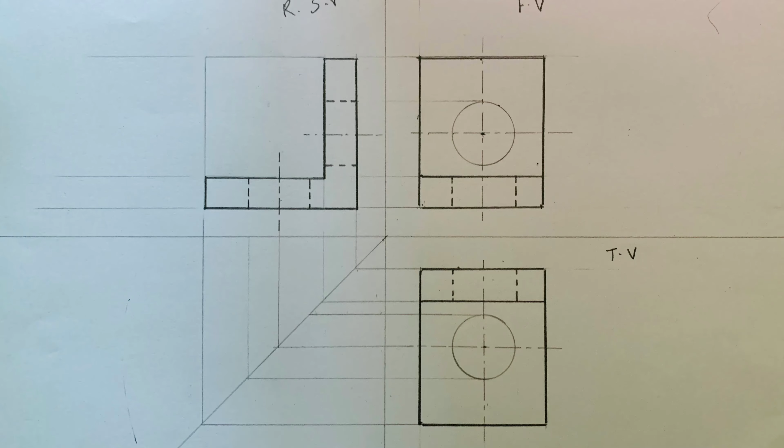So boys, today I am going to start with first angle projection. So first things first, I need to start with the border. So I am going to fix my paper inside. I am going to see, is it correct or not, is it straight or not. Yes, it is straight.

So I am going to mark the border as usual, 10, 10 and 10. So I am going to mark 10, 10 and finally 10, and also another 10 for the name title block. So my paper is ready.

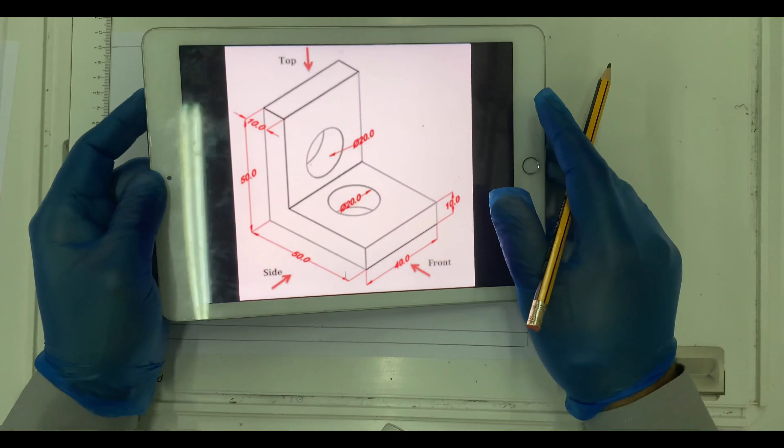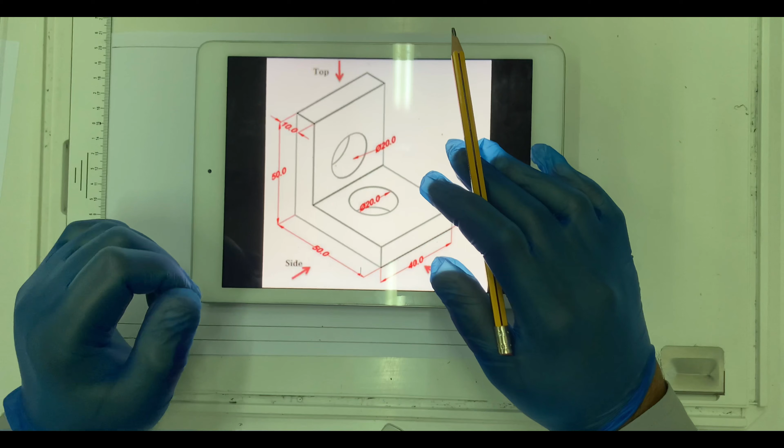Now I am going to study my drawing. This is my drawing in which I have to make 3 views using first angle projection. You can look at the arrow mark here. So this is the front view, and this is the side view, and this is the top view. So I am going to start with the front view, and top view at the bottom, and left side view at the right, and right side view at the left.

So these are my dimensions. So I need to divide my paper into 4. So that is the first thing I do. Let's say I will take half of it, let's say somewhere around 15. Okay, I mark 15. I took my set square. Somewhere in the middle, okay, I made a thin line. I made this into half, and another line. I take the middle of the paper, and here I made a line. So I have divided this into 4 parts. Okay, and I am going to start with my front view here, top view here, and right side view here.

So as I mentioned in the class, we need to maintain a gap of 10 millimeter from here. So I am going to mark another line 10 millimeter away from here. So one is here 10 millimeter and another 10 millimeter here. So I am going to mark a thin line in this direction and also in this direction, and here is where I am going to make my whole drawing. Okay. So my first lines are ready.

Now I took a rough paper and I am going to study this drawing. This is my front view. So if you look at it from the front, this is a 3D view now. So if I want to make a front view only, you can see I will be seeing only this part, which is 40 millimeter and 10 millimeter. So it will look like this, 40 millimeter and 10 millimeter. Let's say this is 40, this is 10, right? Then if you look further, you can see another 50 millimeter. So 10 millimeter is gone. So we will have another 40 millimeter here and another 40 millimeter here.

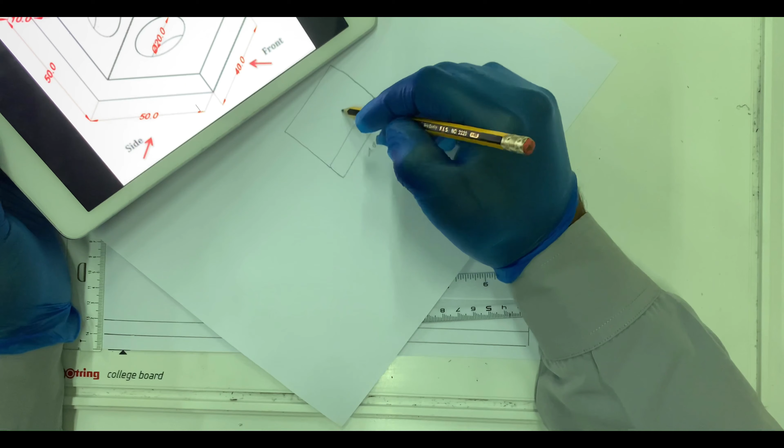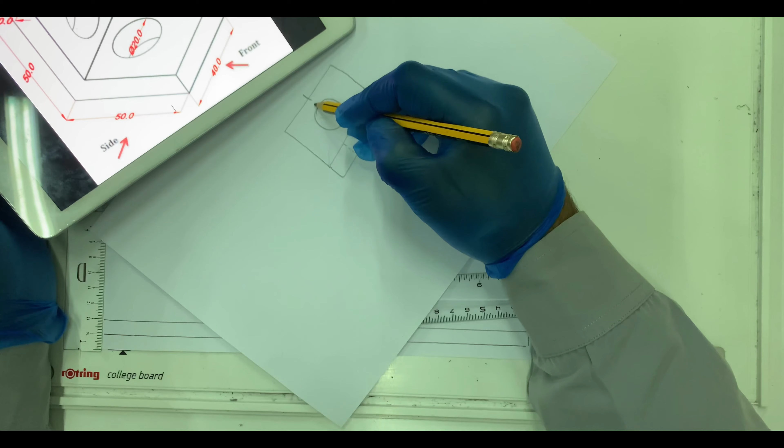And also I can see a circle here, diameter 20. They didn't give any specific dimension. So I will take, let's say, diameter 20. I will take the middle, let's say somewhere in the middle. Here I am going to make the circle. Okay, and there is another circle here which we cannot see, so we will show it as a hidden line. So from here we project, we see this circle as a hidden line, and you know, for any circle we need a center line. So we took the center line like this. So this is going to be my front view, and this is what I am going to draw right now.

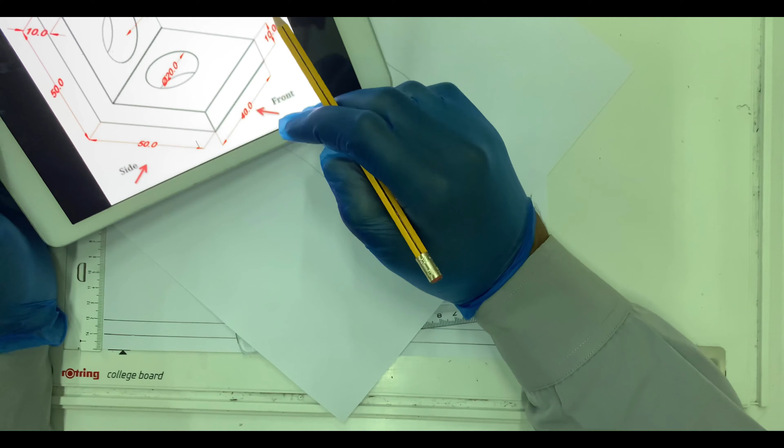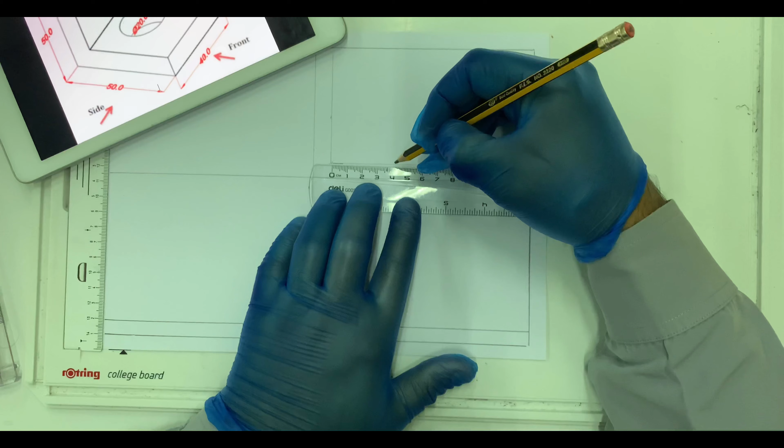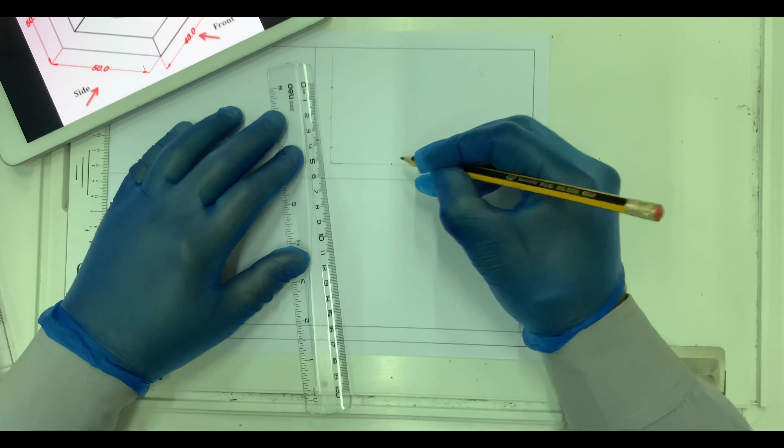Okay. So this dimension is 40 millimeter and the height is 10 millimeter, and this height is 40. So total, 40 plus 10 is 50. So height is 50, width is 40. This is what I am going to do now. So my width should be 40. So I am going to mark 40 here, and the height is first one 10 and second is 40. So total is going to be 50. So I mark a point here, a point here and a point here. So I got 3 points.

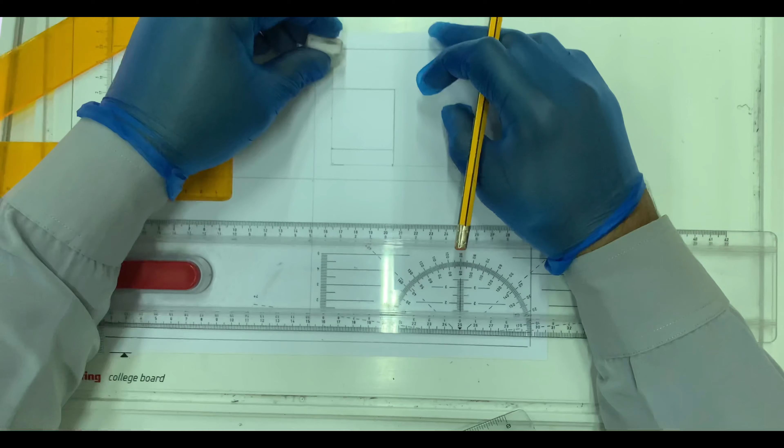Okay. All the extra lines, I can get rid of this extra line, I can get rid of these extra lines, and here also you can see an extra line. So I am getting rid of this, and here also there is an extra line. So I am erasing this. Okay. I am getting rid of this line.

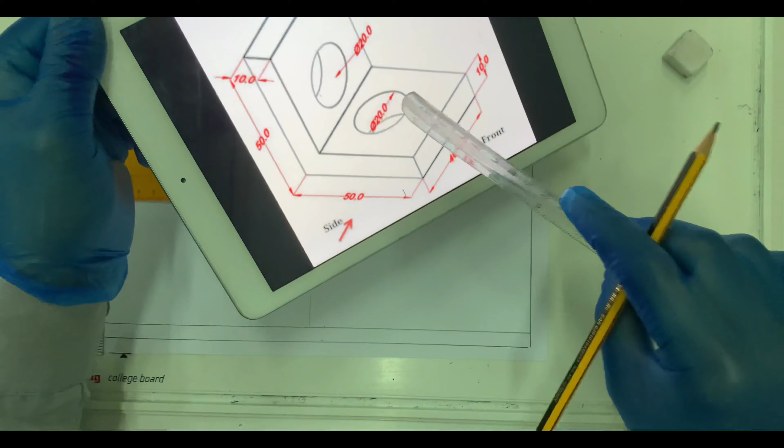Okay, boys. So, I have removed this. Okay. Now, as I told, we need to find out the center point, because we have a circle here and here, right. So, the dimensions are not given here yet. So, it will be 20, 25, 15. Okay, let me mark 25 from here. Okay. This is 50, 40, half of 40 is 20. So, I am going to mark 20 here. I am going to make a center line from here.

From this edge I marked 20 because the total is 40, half of it is 20, and I am going to make a center line: big line, small line, big line, small line. Okay. Now, I take the middle of this. If you look at this, you can see that this is not in the middle, this is a little bit down.

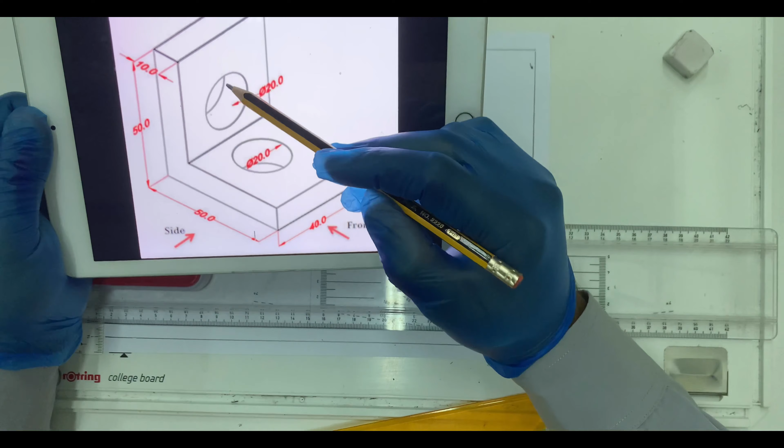So, let us take 25 millimeter from here. From this point let us take 25 millimeter. So, I am going to mark 25 millimeters from here, and I am going to put a point here. Can you see? So, this is 25. I am going to mark this point. I am going to make another center line here. Small line, big line, small line, big line. So, my center lines are ready.

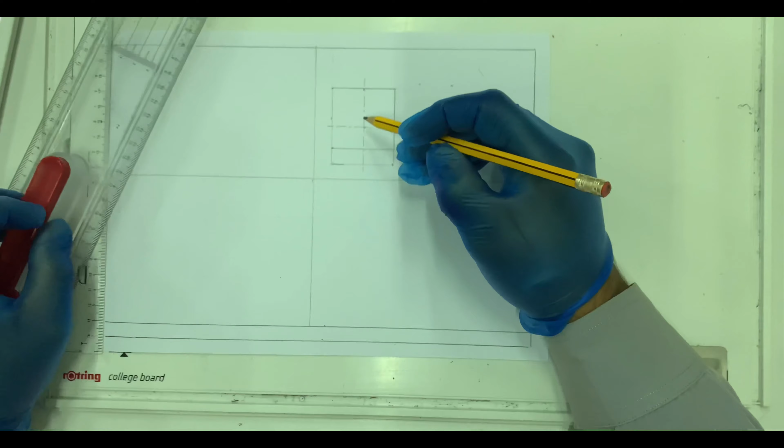Now, as per this, I need to show a circle here of diameter 20. Diameter 20 circle means radius 10. So, in my compass I am going to mark 10 millimeter from this point to this point. Okay. And I put it in the middle, and I am going to make a circle. Can you see this? I made a circle.

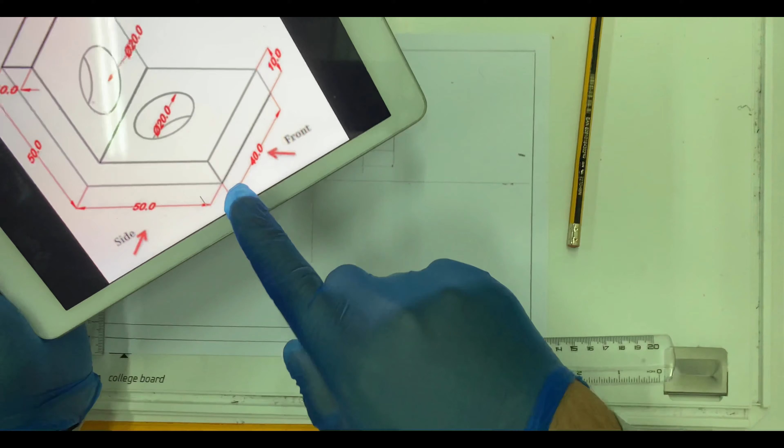So, this is how it looks when I look at this object from the front, but this circle we will also see, not directly, but as a hidden line. This circle we have already shown here, and this circle we have to show as a hidden line. So, I am going to place my set square here, and using the set square I am going to project this. See, this is going to be here, exactly in this dash dash dash, and in here also dash dash. Can you see? So this front view is complete.

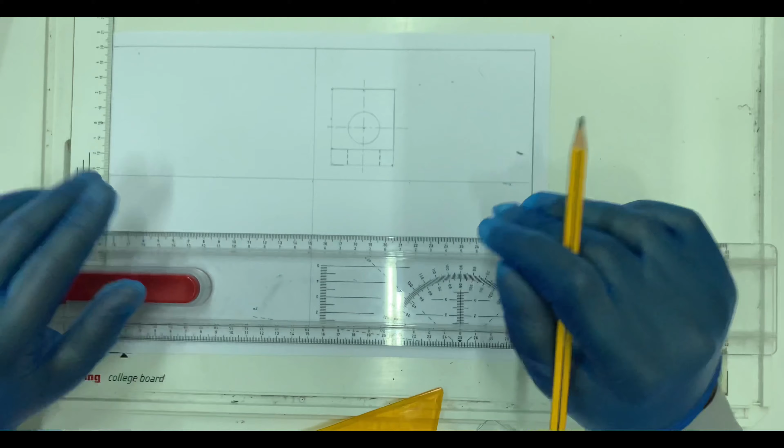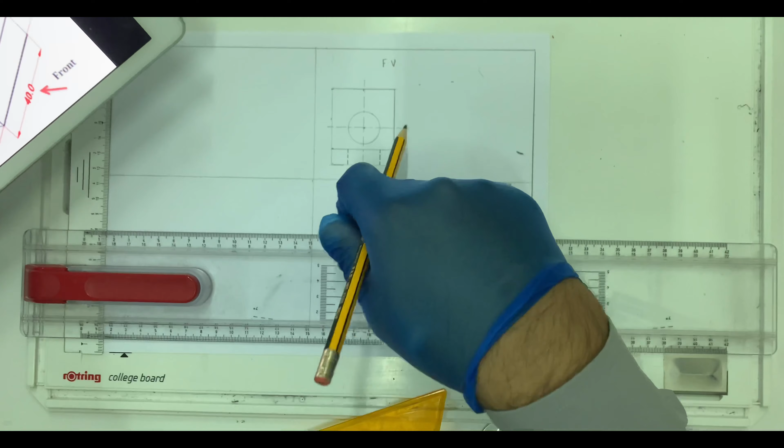Once the front view is complete, we will go to the next view. We can name it as FV, front view. Now we have to make the top view, how it looks when we look from the top. Top view should be here in a first angle projection. Top view will be in the bottom, at this point. So in order to do that, we need to do some projections. You know what projections are? If you don't know, I can help you with that. We will need to project these lines to the bottom.

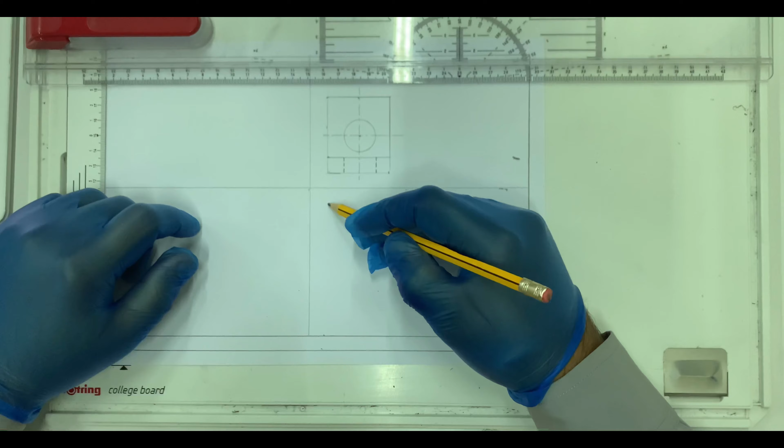Okay, and as usual, we need a 10 millimeter line here. So I am going to do that. So this I am going to put, let's say, a 10 millimeter line here, and another 10 millimeter in here. So I kept it here and I put it here, and I made another 10 millimeter line here.

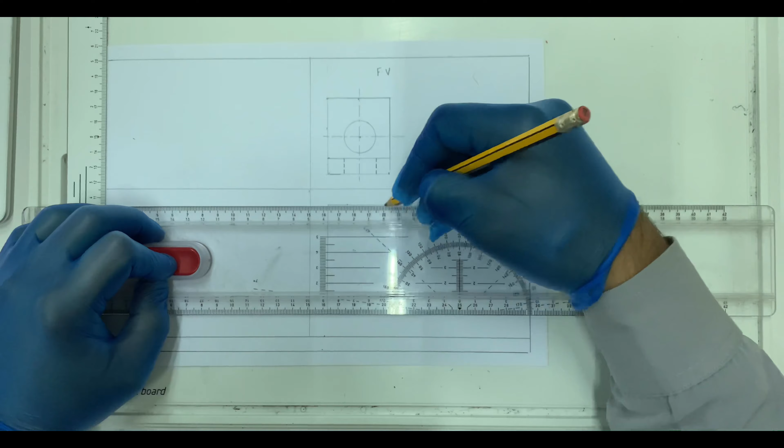Okay. Now I am going to project all the lines here. So I will keep my set square here, T-square here, and I am going to project all these lines. This line I am going to project. This center line I am going to project. You will see how much we need.

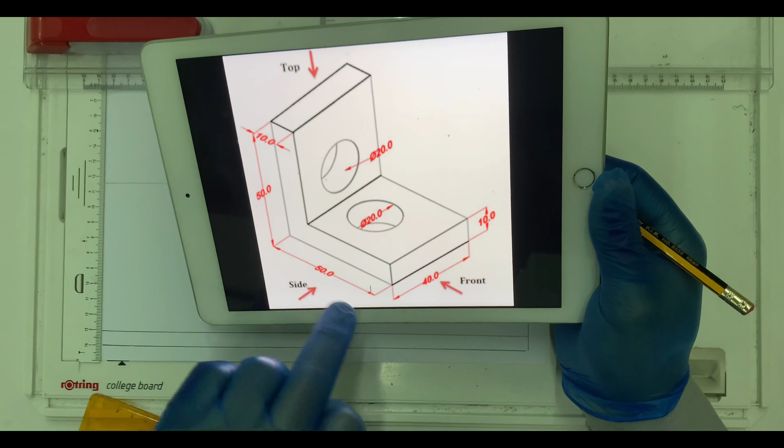If you look from the top, this thickness is 10 millimeter and this whole length, from this point to this point, is 50. So I need to mark only 50 millimeter from here. So from this point I am going to mark 50, and this is my point. So I moved it here and I joined these 2 points.

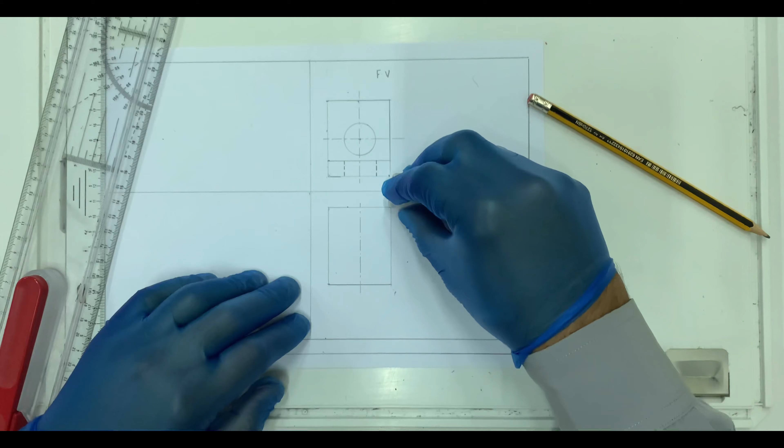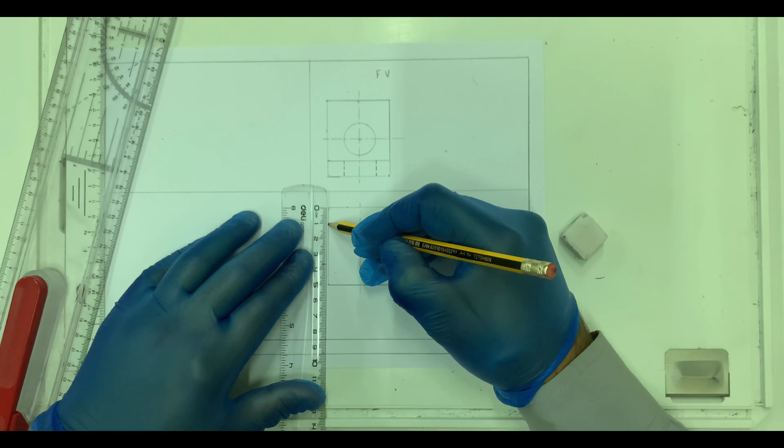Okay, I don't want this extra line, I don't want this extra line. Okay, all the extra lines I have removed. I think you got it. But if you look from the top, you will see this as well as this. So we need to show this line which is 10 millimeter from here. So I am going to mark another 10 millimeter from this point to this point, and I am going to mark this. Now there is a problem.

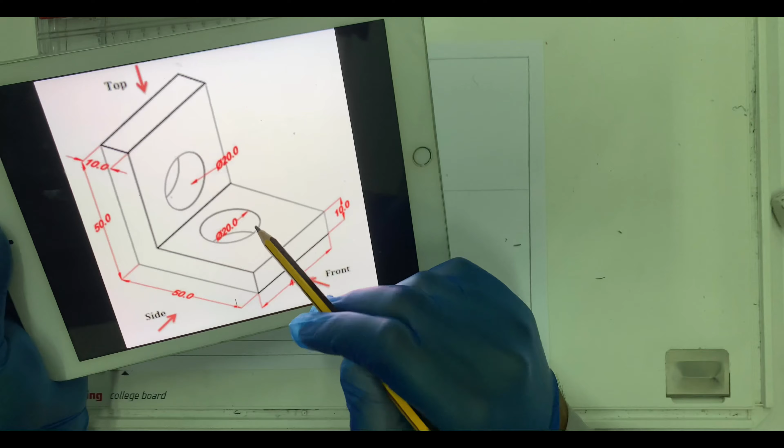If you look from the top, what are the things you are going to see? You will see this line, yes, you will see this, and you are going to see this circle as well. This circle you must show. Similar to this, you need to show this circle.

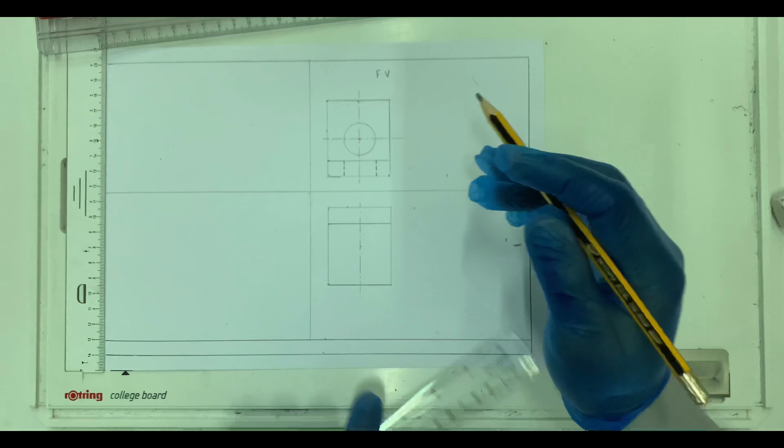Okay. So I will mark 25 from this point. This is 25, and I will put a dot at 0. Okay. And here I am going to make the center line: big line, small line, big line, small line, big, small, big, small.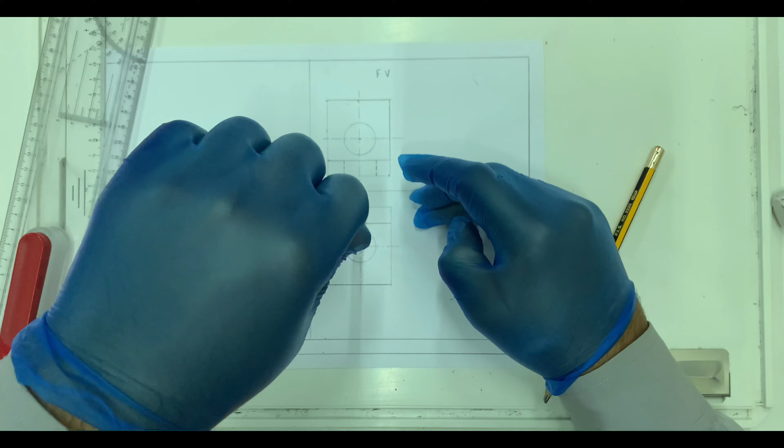Okay. Then I will take the same compass which I used to draw this circle; the same dimension circle I am going to repeat here also. So from top, this is how it looks, and from top, when you see, this will be like a dashed line, this will be like a dashed line.

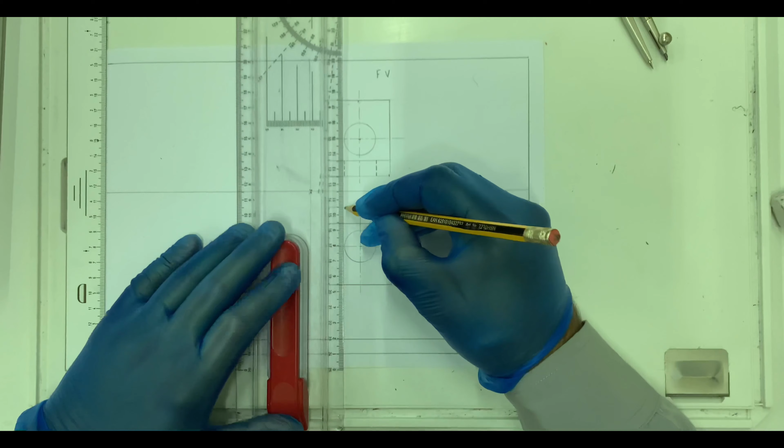So I will project these dashed lines from here. See, the same dashed line I am going to project here. Okay. So, this is my top view, I call it TV: front view, top view. Now, I am going to make a right side view, which will be on the left of this.

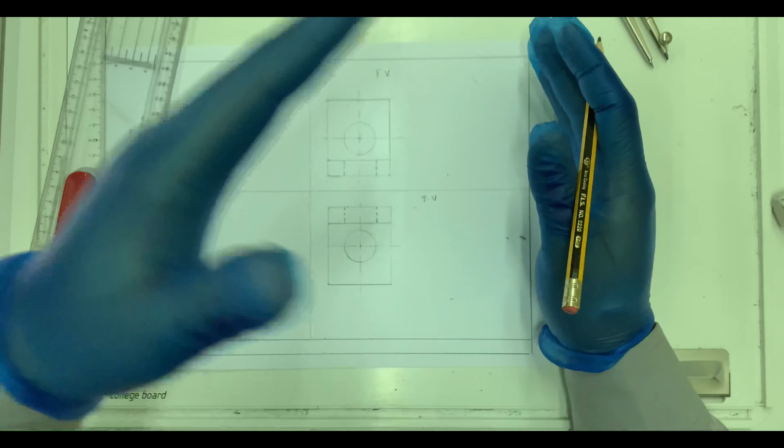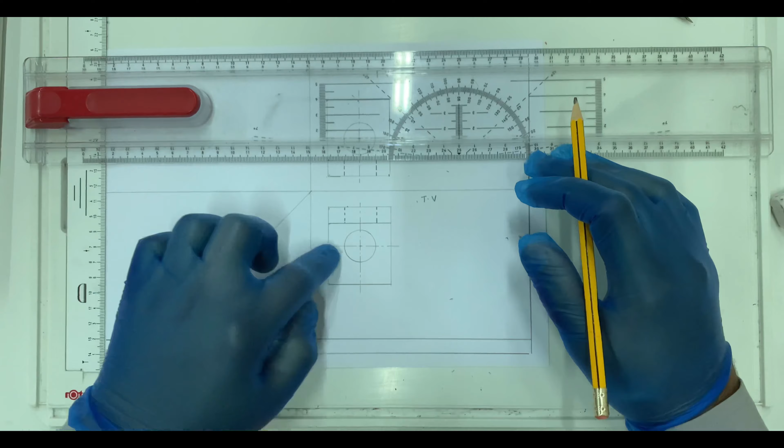So, in order to make that, we need a 45-degree set square. Okay. This is my 45-degree set square, and I am going to mark a line here from this point exactly. I am going to put a mark here. So, this is my 45-degree line. And I am going to project all these lines in here. That is why it is called projection.

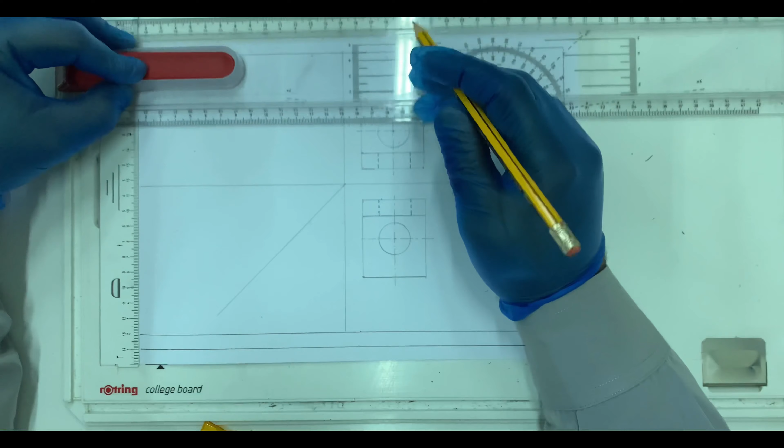Did I tell you about projection? I am going to project so many lines. Just watch me carefully how I am going to project. These lines, see, these lines I am going to project. Can you see? This way. I am going to project this line this way, and this line this way. How many? It is a thin line, not a thick line. 1, 2, 3. And from here also I am going to project.

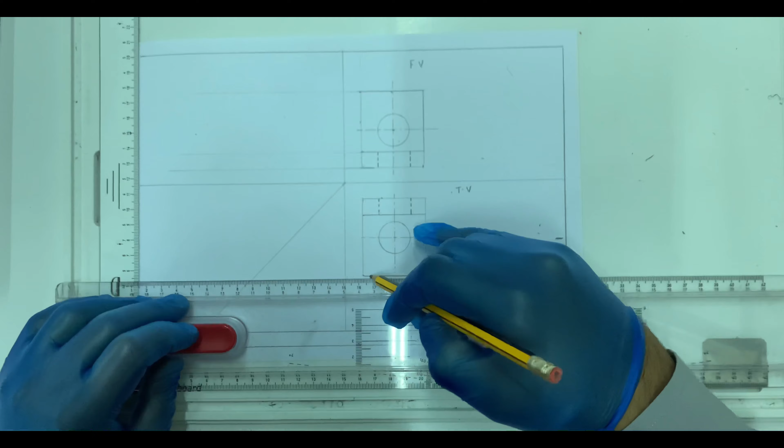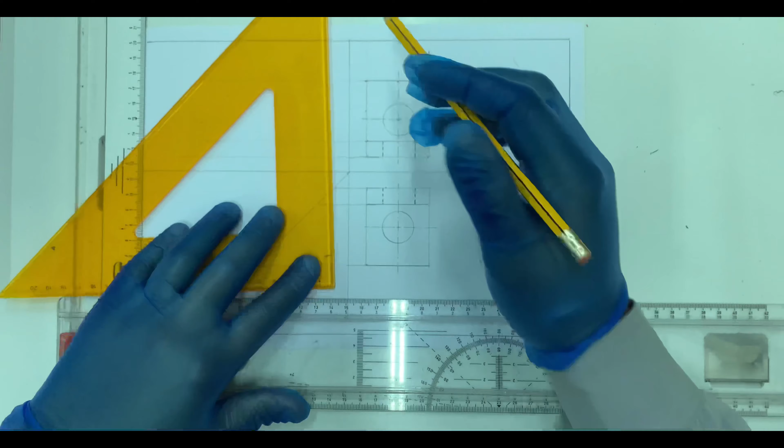From here, when I am projecting, it goes only up to here, only up to this point. And then I am going to project here, and then here. So, I got 1, 2, 3. Now, I need to project it upward. It's funny, it's interesting. I am going to project it up, project it up, and last I am going to project this up. You can see a drawing has started appearing here. I don't know whether you will be able to see it properly.

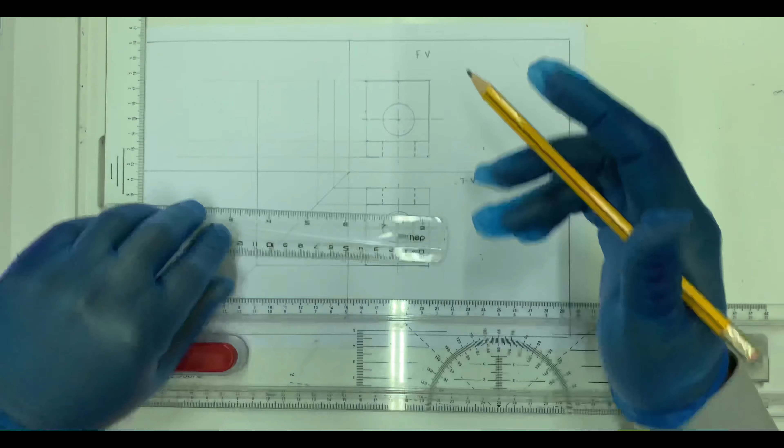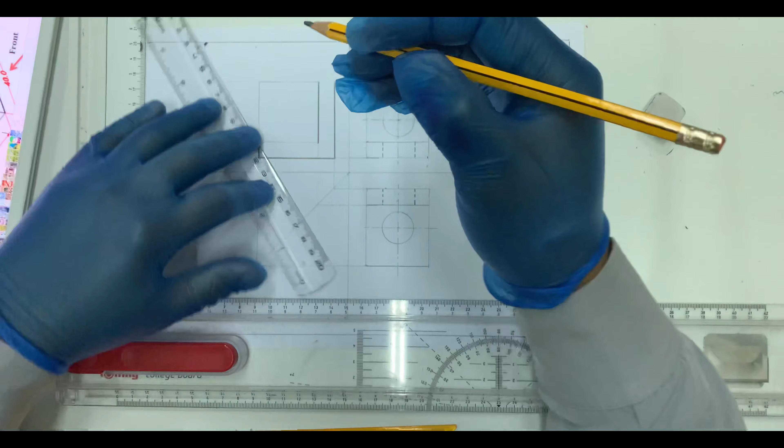Yes. Okay, boys. Now, we have to highlight only the drawing which is a part of this drawing. For this drawing, we need only this to be highlighted. So, from here to here we will highlight, and from here to here, and from here to here, and from here to here, and finally, from here to here we will highlight.

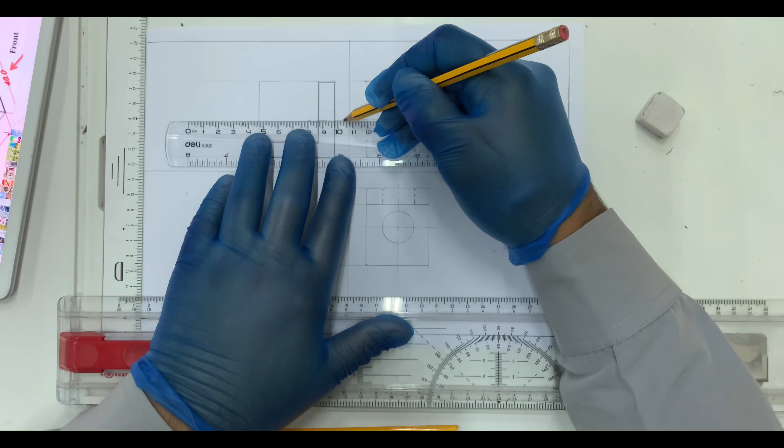And this is the part of this drawing, and this is the right side view, which is on the left. Still you will be able to see these center lines. This center line also we will project. There is a center line here as well; this also needs to be projected. I make it a straight line up to here. Then I will make the center line there: big line, small line, big line, small line. Here is my center line, here is my center line.

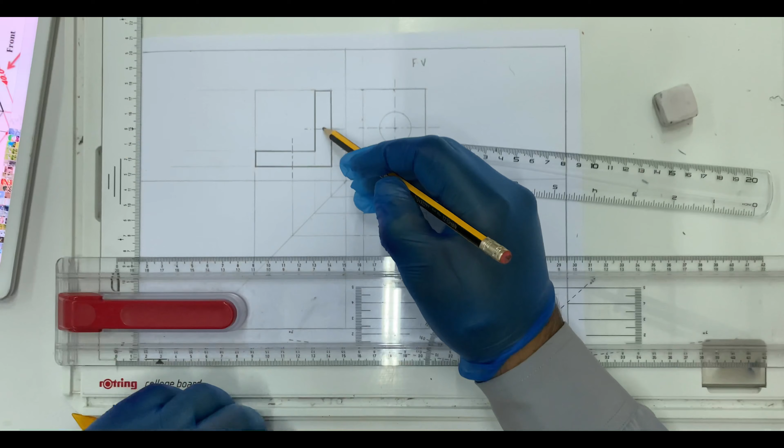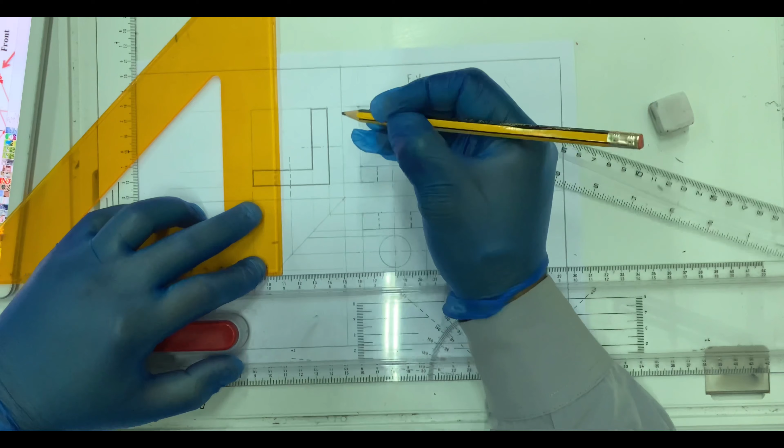And just like here, we need to project this as well. We will project this, and this, and this line goes straight, and this will be like dash, dash, dash, and this will be like dash, dash, dash, and in here also. This also needs to be projected from this edge. It's going to be like this, dash, dash, dash, and from this edge it's going to be dash, dash, dash.

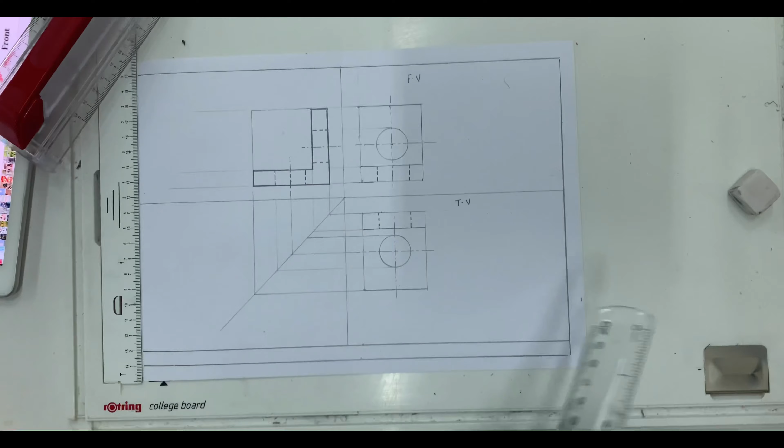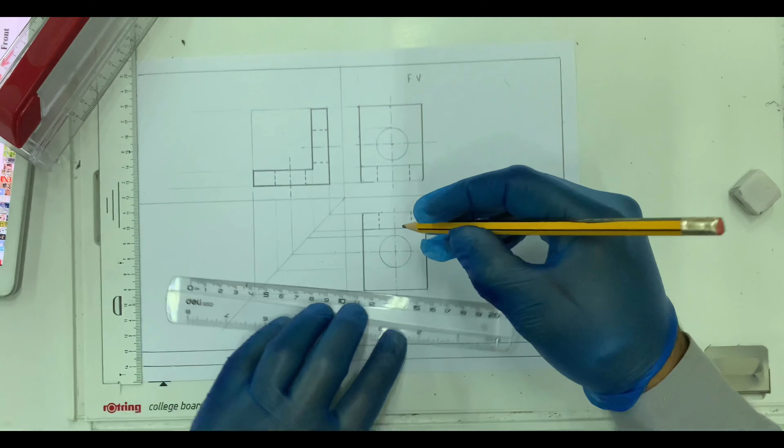Now we can highlight only the drawings, not the projection lines. From the thin line we will make everything thick, so that our drawing will be highlighted properly. I am going to make it thick, so only our drawing will get highlighted. This should be the last job. Once you finish all the drawing, then start highlighting the drawing. Don't do it before finishing all the drawing.

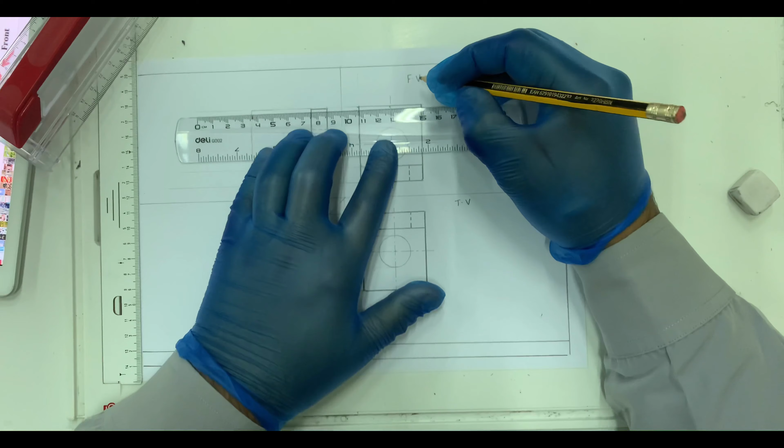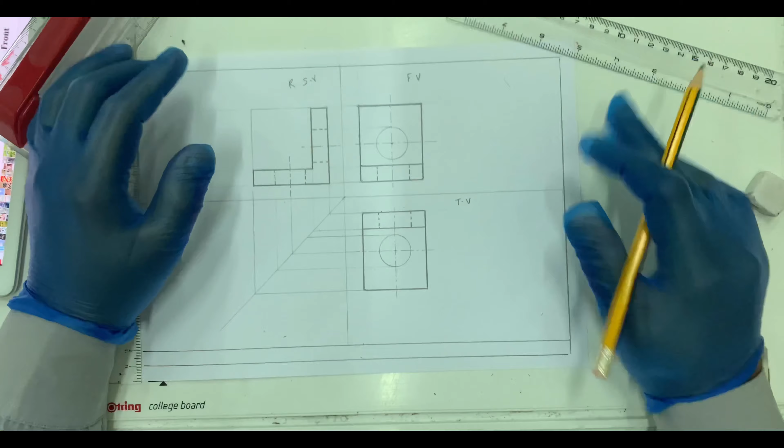This is the side view, so I call it SV. I will call it RSV, right side view. So now we have got a circle here, circle here, and we can highlight this. So this is how a first angle projection will look. I hope you understand. If you don't understand it well,